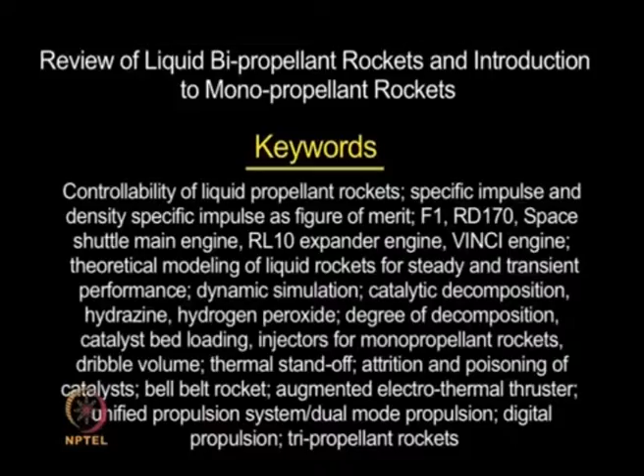Good morning. In today's class, I will be dealing with monopropellant rockets and hybrid rockets as a continuation of the chemical rockets. But just to make sure we are very clear about what we have done so far, let us quickly review what we learnt in solid propellant rockets and liquid propellant rockets.

We went into detail on solid propellant rockets, but we said controllability is a problem. What do we mean by that? Once a solid propellant rocket gets ignited, like you have a star grain or a cylindrical grain, once this grain is ignited, it is just not possible to stop the combustion.

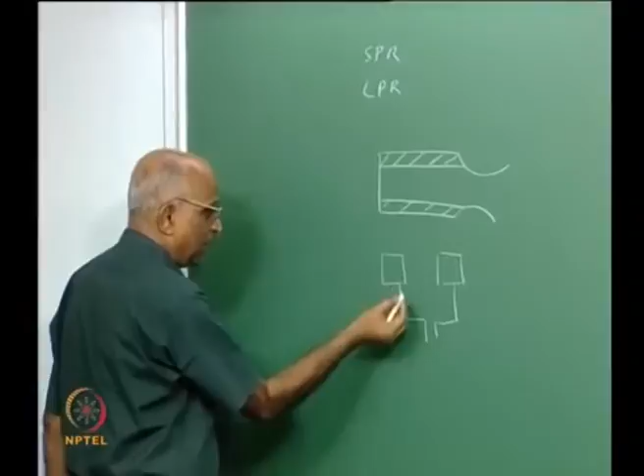Whereas in a liquid propellant rocket, since you are feeding the propellant from a tank into the combustion chamber, maybe by a pump, maybe by gas pressure, regulated or blow down mode, or stage combustion cycle mode, it is always possible to stop feeding it and you can have control.

Therefore, a liquid propellant rocket is more versatile in that control is possible. Not only can you control the flow, but supposing I have a control system to control the chamber pressure, I put some control here, compare it with a reference, and using this control system I can control the chamber pressure. I have a reference chamber pressure and make sure the reference and actual values are the same.

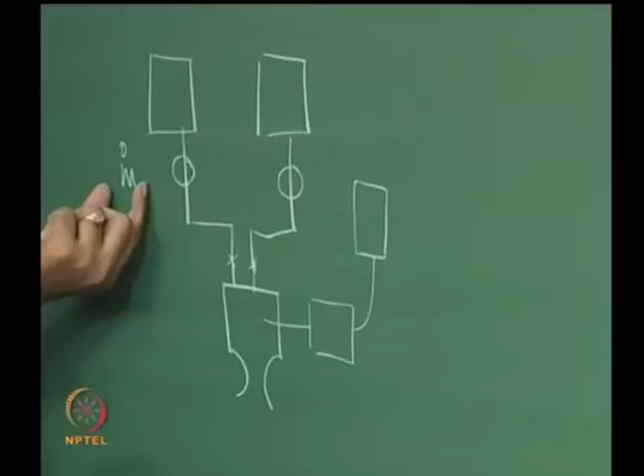Supposing I want to control the mixture ratio, maybe I monitor through a mass flow meter the mass of fuel flowing in, let us say m dot f. I can measure m dot o, and instantaneously record the ratio of m dot f to m dot o through a particular circuit. I feed this signal through a mechanism, and if I find the mixture ratio is exceeding, I can give a command to these valves, or to a valve upstream, to slow down.

Control is possible, not only starting and stopping, but also mixture ratio control, pressure control, and hence thrust control. Therefore, we say a liquid propellant rocket is more versatile.

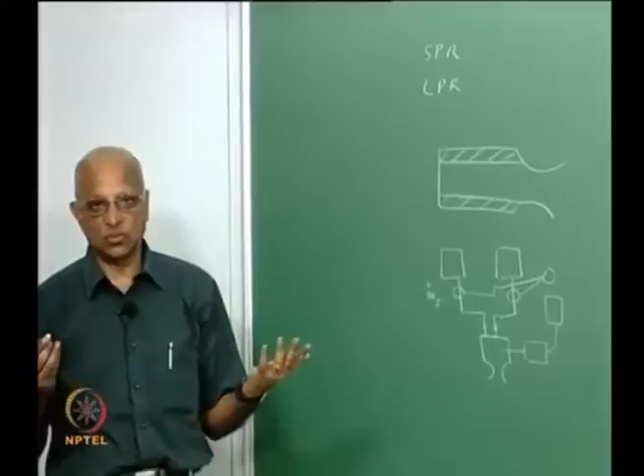Not only is it more versatile, it also has higher performance compared to solids, because in solids we add aluminum, so the molecular mass of the exhaust is high. Whereas if I choose hydrogen-oxygen here, my performance, or specific impulse, is quite large. Therefore, in general the liquid propellant rocket is more versatile and has better performance than solid propellant rockets.

But then we also see it becomes a little more complex. I have plumb lines, tankages, and pumps, and therefore it is a little more complicated. But I will come back to this. Whether we can simulate this through theory is something questionable, and maybe I will spend some time on it.

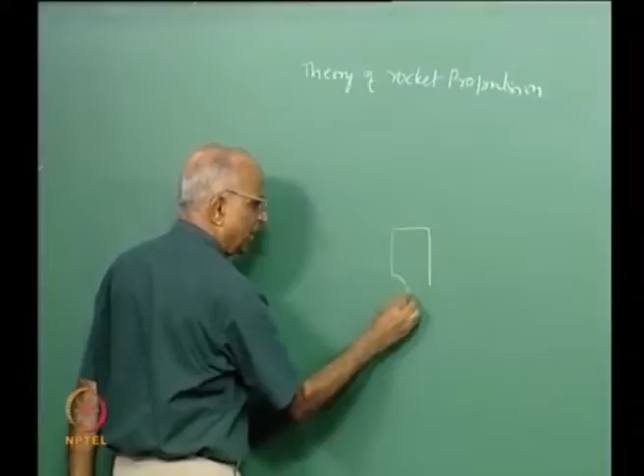Therefore, we say liquid propellant rockets are more versatile, and let us take a few examples. Like for instance, when we studied the theory of rocket propulsion, you will recall we said boosters are those rockets used during takeoff, and the upper rockets are known as sustainers or upper stage rockets.

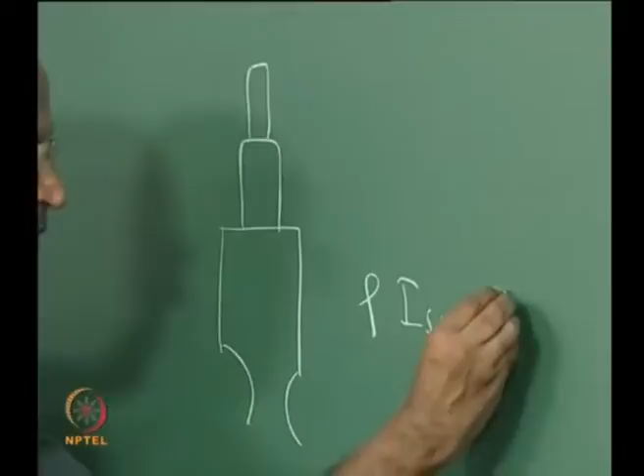For booster rockets, we found that in addition to ISP, the term rho ISP becomes important. You will recall why we said that: the mass of the casings, the mass of the upper stages, become important, and under those conditions we derived an expression that rather than ISP, the product of the density of the propellants multiplied by ISP becomes a figure of merit of the rocket.

Therefore, whenever I choose the booster stages, that means the stages which first start off, it is essential to use what we call dense propellants. What do we mean by dense propellants? Propellants having higher density.

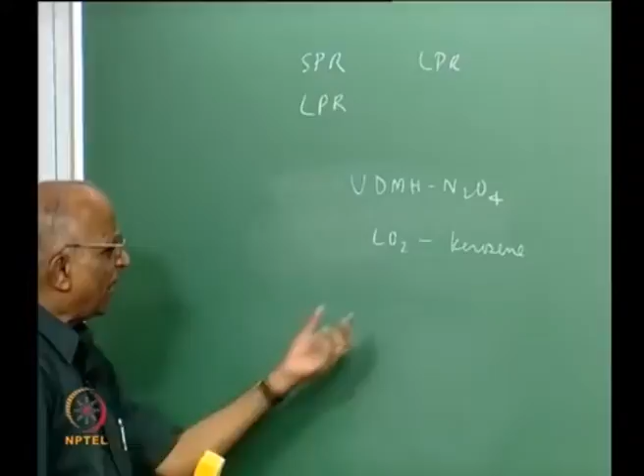And when I talk in terms of dense propellants, what immediately comes to mind is, can I use propellants which are dense, like UDMH, which has a good density, maybe with N2O4 as an oxidizer? Can I use liquid oxygen with kerosene? These are somewhat denser, and therefore we find liquid oxygen kerosene has been traditionally used for the booster stages.

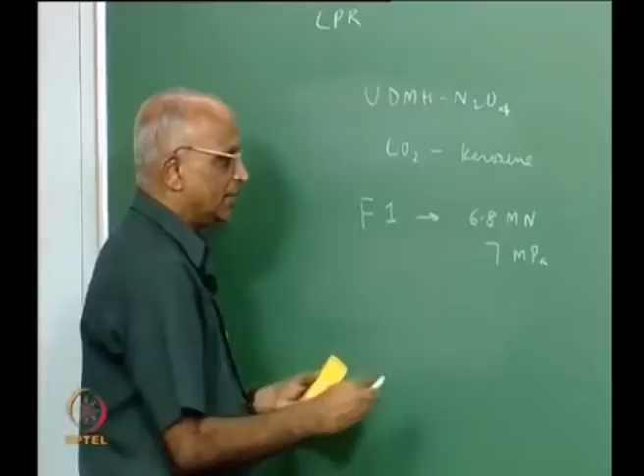The chamber pressure of this, which uses liquid oxygen and kerosene, is something like 7 MPa, that is 70 atmospheres. Pressure is low, thrust is large, and the cycle of operation is the gas generator cycle.

Another rocket used as a booster is the Russian rocket known as RD-170. Its beauty is it has a higher thrust, of the order of 7.25 meganewton, maybe same class, but the chamber pressure is extremely high, of the order of 24.5 megapascal, that is something like 240 bar. Since it is high pressure with large thrust, we use the staged combustion cycle engine.

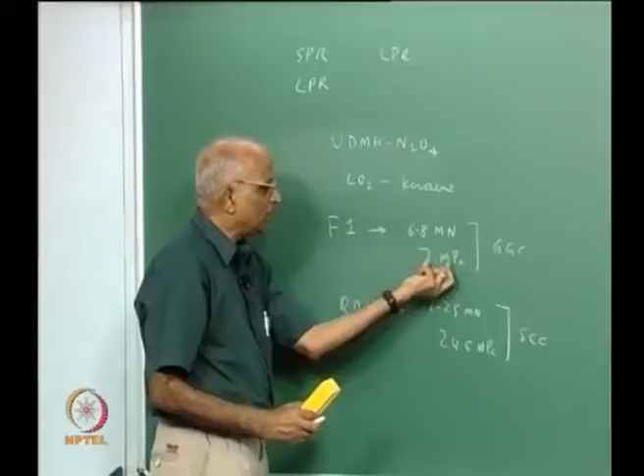Therefore, these are two examples of very large rockets which use liquid oxygen and kerosene. One uses the staged combustion cycle, and when you go to lower chamber pressure, you use the gas generator cycle. These are the two typical examples.

In India we started with UDMH N2O4, and this is what the French used earlier in their Ariane launch vehicles for boosters. But ever since we learned that UDMH is cancer causing and also costly, the trend is not to use UDMH. So Ariane rockets 1 to 4 made use of UDMH N2O4, but the more recent Ariane 5 does not.

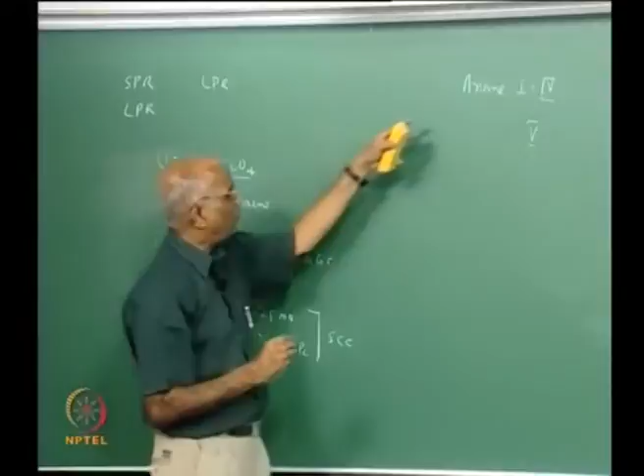What we use instead is a derivative of what was used in Ariane. It also uses a gas generator cycle, and the typical thrust is around 60 ton, and the chamber pressure is of the same order, around 58 to 62 atmosphere pressure, that means 5 to 6 MPa.

These are some of the booster engines with the heavy propellants, LOX, kerosene, and UDMH N2O4.

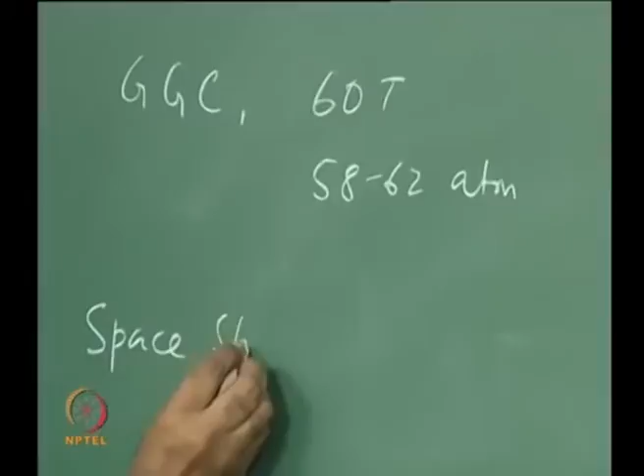But what was done more recently is, if you look at the space shuttle - mind you, the space shuttle has now performed its job, it is no longer operational, the last space shuttle is over - what was done in the space shuttle is you had liquid hydrogen and liquid oxygen engines. These generate a thrust of around 1.8 meganewton. The chamber pressure is again quite large, almost 19 MPa, that means 190 atmosphere pressure, and this used the staged combustion cycle.

Even though the density of the propellant is small, they have a huge booster, and we have seen pictures on the back of it. You have a liquid hydrogen tank that carries the liquid hydrogen, and you operate with liquid hydrogen and liquid oxygen. You have 3 such engines used in the space shuttle.

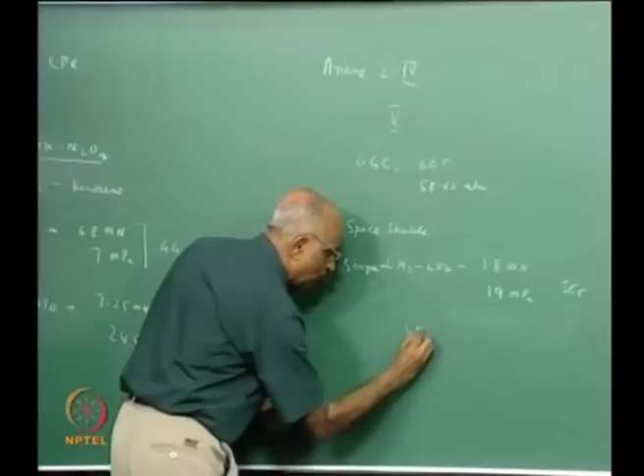Whereas if you look at the French type of things, as I said, the Ariane 5 went off from using UDMH N2O4 to using LH2-LO2. They have a thrust of around 1.1 meganewton, that means 1.1 into 10 to the power 6 Newton. The chamber pressure is around 11 MPa, and since the chamber pressure is less, they use the less complicated gas generator cycle, GGC.

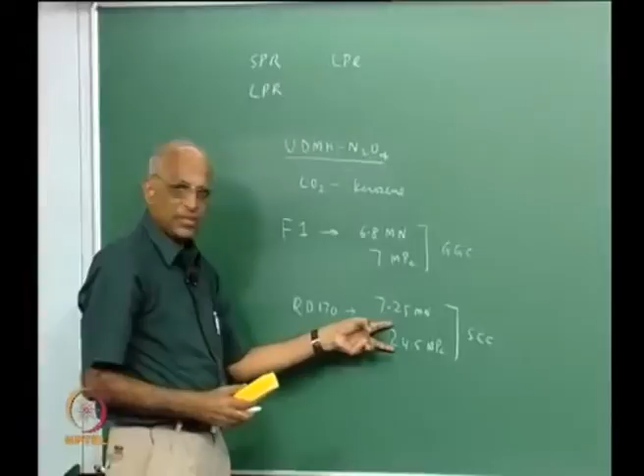Therefore, you find different types of propellants are used in different stages, and when we want much less powerful engines, we can even go for gas pressurization and use it as the 4th stage. Maybe you can use MMH and N2O4, and other propellants like what is used in missiles. These are typically the different type of engines used. We see sometimes gas generator cycle being used, sometimes staged combustion cycle is used. Staged combustion cycle is used only when the chamber pressure is very high, and these give extremely high performance.

Something we must remember, I told you of an engine known as the RL10 engine, which uses liquid hydrogen, liquid oxygen, but uses the liquid hydrogen in an expander cycle. What was an expander cycle? One in which the hydrogen gets evaporated while cooling the chamber, and that vapor of hydrogen is used in running a turbine.

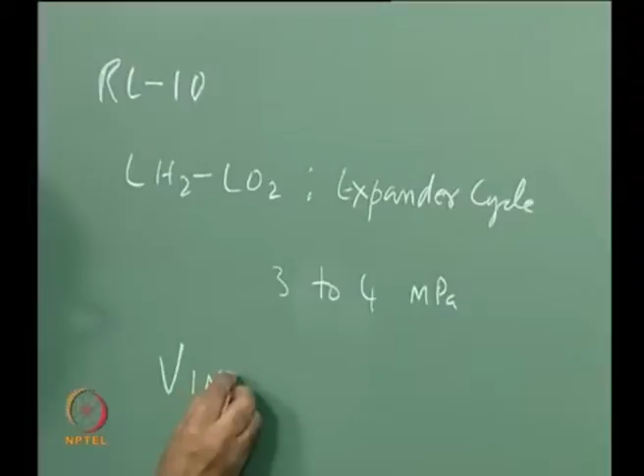This is very popular. The chamber pressure is low, of the order of 3 to 4 MPa, that is 30 to 40 atmosphere, and this has been extensively used in many missions for the upper stages. Of late, French people are working, and that is challenging, on a particular rocket known as the Vinci rocket. I give a homework problem on the Vinci rocket. This again uses the expander cycle.

I ask you to calculate what must be the heat transfer from the chamber to the coolant in order to have an expander cycle. This Vinci rocket has a turbine which rotates, I told you, around 1 lakh RPM. These are some of the developments, maybe we should keep in mind as we study liquid propellant rockets.

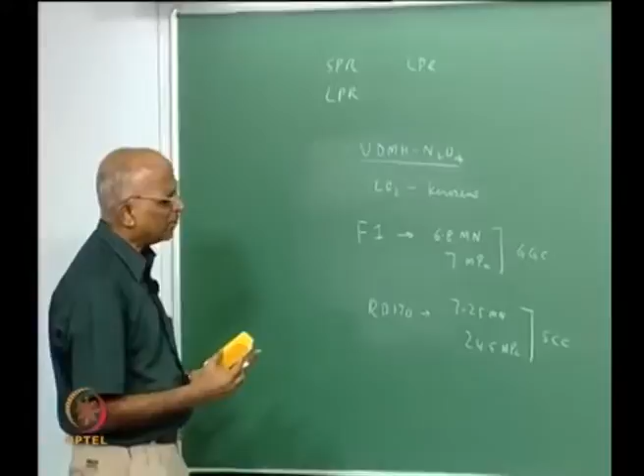It is quite challenging. We find Vinci being developed, we find other rockets being developed, but something else with respect to liquid propellant rockets compared to solid propellant rockets is it is easily amenable to theoretical analysis.

Not that I am saying it is superior in any way. A solid propellant rocket has distinct advantages. Supposing I want a short takeoff and landing for an aircraft, I can just have unrestricted burning, attach one or two rockets beneath my wings, and burn it. It will give me thrust immediately for a few seconds, and I can take off in a very short runway, as is necessary in forward areas or in some military aircraft.

So we also call it rocket assisted takeoff. The short takeoff and landing which uses rockets is also known as rocket assisted takeoff. This is possible with solids, but what I wanted to say was, let us not say everything is liquid, but when we studied liquid rockets,

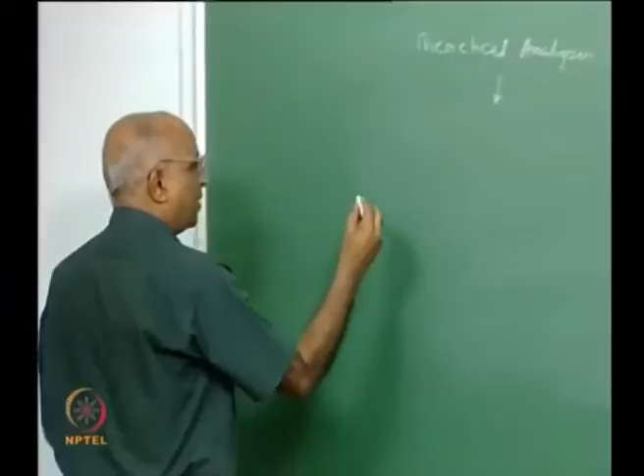we never really studied about liquid rocket. A description of rocket is like this. All what we studied is, we have a tank, and propellant flows in pipelines.

If it is a pump, I know pressure is increased in a pump. I supply it to the injector. What does the injector do? It sprays it into the combustion chamber. The thing evaporates and burns. Everything we have studied in other subjects, fluid flow, maybe thermodynamics of generation.

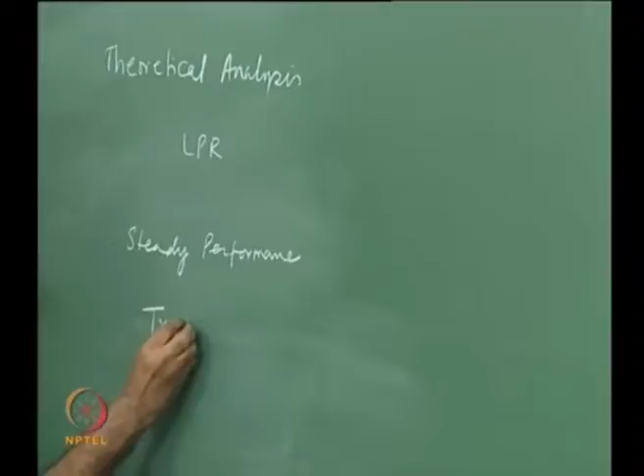Therefore, we can say a theoretical analysis of a liquid propellant rocket, for let us say steady performance prediction, or transient performance, or performance, or even if you want to look at the dynamics of it. Maybe if I were to put some shock into one of the systems, how is the rocket going to respond? Something like dynamic response is all possible, and this is where some attention is required, and there are several people working in these areas at present. Let us quickly go through what I mean by this and how do we do it.

Supposing we have a liquid propellant rocket, what did we have? We have the tankages, and from the tankages what happens? I just draw a single tankage. From the tankage through the plumb lines, maybe curved and all that, through these lines propellant flows.

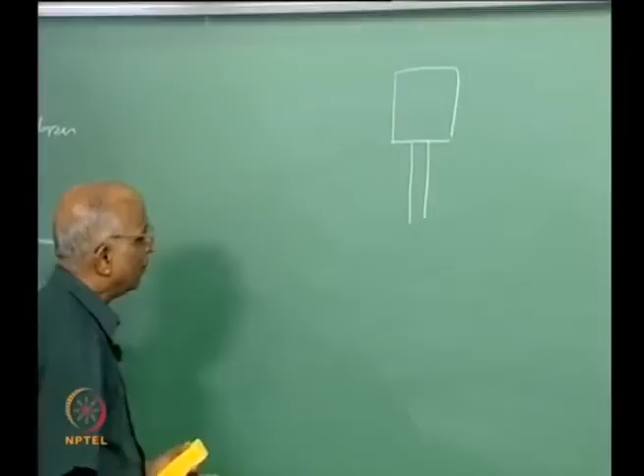And how do you establish the pressure? If the tank pressure is, let us say, PT, how do I get the pressure here? I get a drop in pressure, and I say that the drop in pressure goes as maybe 4FL over D into V squared by 2, maybe under some conditions, but I need this. Therefore, I can write this equation as pressure drop in a pipeline goes as something like a resistance into velocity, goes as the mass flow rate, let us say m dot square of the propellants.

But under dynamical conditions, I have the mass of propellant which accelerates. That means I have mass into acceleration, or rather mass into dV by dt. And what is the mass? Rho AV. Therefore, I am talking in terms of dm by dt, and because of this acceleration, I have a pressure drop taking place, I have a force due to acceleration, which is Newton's second law,

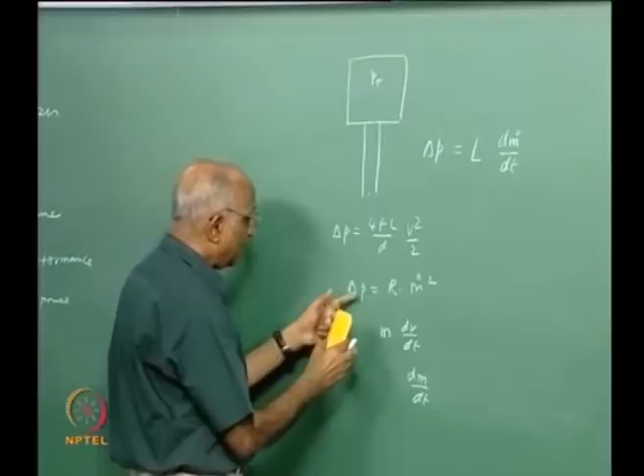and therefore I can say the delta P due to acceleration I can write as something like an inductance, or some value of inductance, like we have current changing into dm dot by dt, because I have dv by dt, and therefore I can write the net pressure drop under dynamical conditions as something like L into dm dot by dt. This is the pressure drop in a line under static conditions, and this is under dynamical conditions. Therefore, this is the total pressure drop.

How do I get the pressure rise in a pump? Let us say this feeds into a pump, and what does the pump do? It increases the pressure from a small value to a larger value, and here you get the outlet. And how do you get the pressure in a pump?

We had said pressure rise in a pump, delta P across a pump, is equal to the flow rate Q, or m dot, into something like delta P. But let us be clear, from a units point of view, it should be m dot times delta P divided by density, which is the rate of work done in a pump.

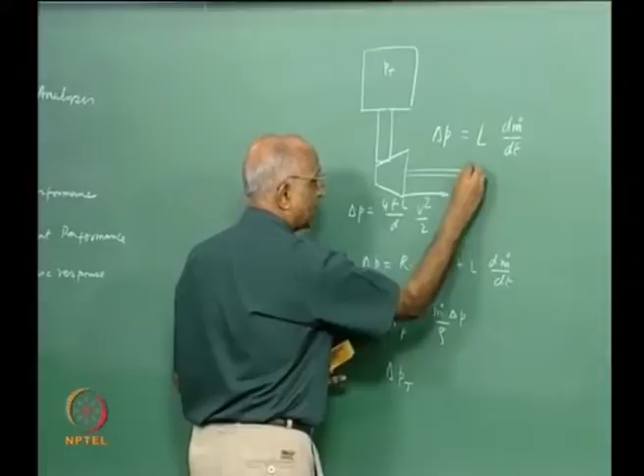Similarly, the pressure drop in a turbine which drives this pump is given by the work done in the turbine, taking gas from the gas generator and driving the turbine. We said it equals mass of the gas generator into Cp into Tgg into 1 minus 1 over the expansion ratio in the turbine, into gamma minus 1 by gamma. This was under steady conditions.

I can figure out the pressure here and there, go along all these lines, get into the injector, and find out the mass flow rate through the injector. Therefore, everything can be calculated from simple equations.

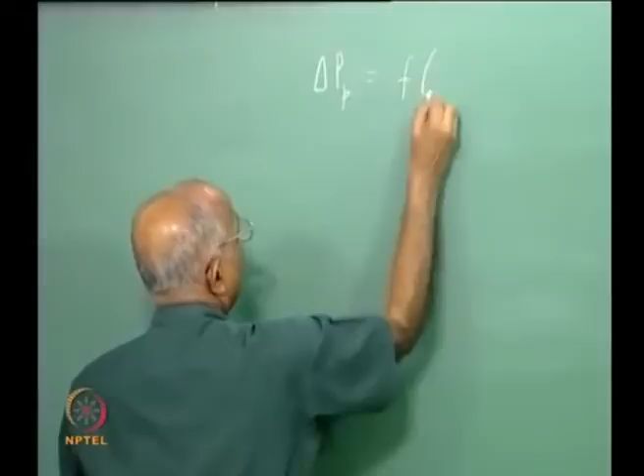Let us go one step further. We know the pressure rise across a pump depends, as we saw with non-dimensionalization, on the speed, the mass flow rate, and the density, or Q and rho. I can write this as some constant k1 into n squared plus k2 into n into the mass flow rate plus k3 into m dot squared, and this can be proven considering the blade geometry, that the pressure rise across a pump is given by this expression.

We also told ourselves that across a turbine, since all turbines were impulse turbines, this could be written as the resistance into m dot squared. Therefore, the pressure rise across a pump can be written in terms of the speed of the pump and some constants, and similarly, the pressure drop across a turbine can be written like this.

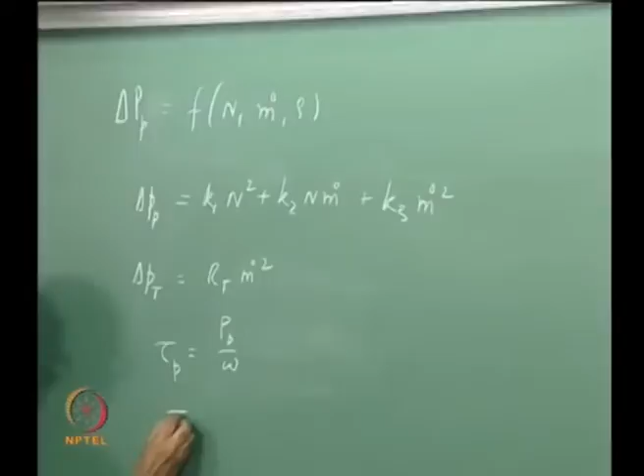We already had the expressions for power of a pump and power of a turbine. How do I use these? Let me put it in terms of capital P. I can translate the power into a torque. Torque of a pump, tau of P, is equal to power of a pump divided by the angular rotation. Tau of a turbine is equal to power of a turbine divided by omega.

The turbine drives several pumps, maybe the fuel pump, maybe the oxidizer pump, and therefore torque from a turbine minus torque from a pump should be equal to the moment of inertia of the moving parts, which can always be calculated, into d omega by dt.

Therefore, I can now use all these sets of equations together to find out the pressure at each point, the speed of the turbine, and not only that, but I can find out as a function of time how the speed of the pump should develop and how the pressure should develop.

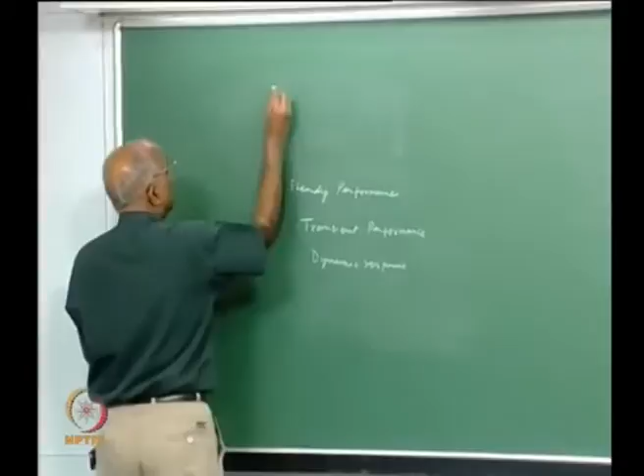What do I use to get the pressure? I have a gas generator, and the equation for the gas generator which we wrote earlier was dm by dt equals mass which flows in minus mass which flows out. Mass which flows in is known from the mixture ratio. Mass which flows out equals 1 over C star into P into AT. And dm by dt equals dP by dt into V by RT, which equals m.

Therefore, I am able to get everything I want through this set of equations which describe my system, and it will indeed be challenging to put together all these things with dynamics, and this is what all of us like to do with liquid propellant rockets. We can say this is something like a dynamical simulation or theoretical simulation of a liquid propellant rocket.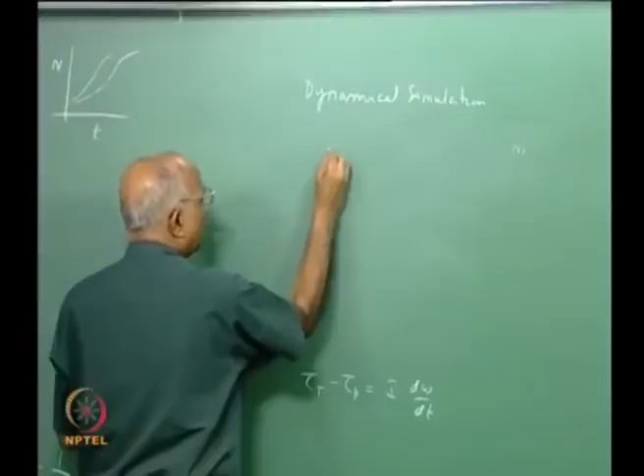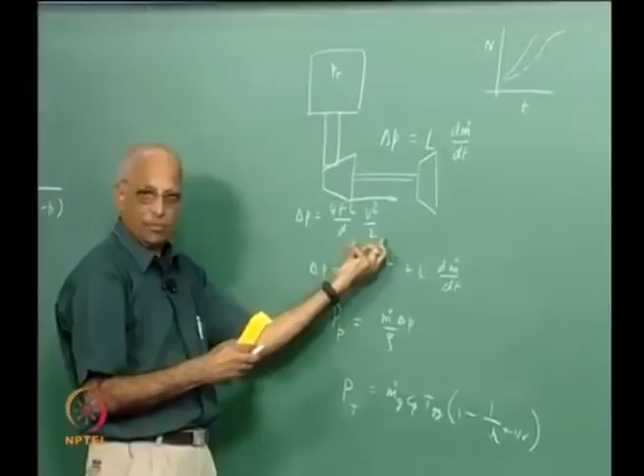You will see people always talking in terms of: do you have a dynamical model of your system, or a static model of the system? All that is meant is these equations have to be put together. Maybe I went through it hurriedly since we've covered individual components, but we should keep this in mind. In a dynamical model, not only do you solve for the parameters at different places, but also you put in your control system. What is the control system? You would like the mixture ratio to be fixed in the chamber, and for that you need a control system which controls this as it is moving. This is all about liquid propellant rockets, and you see even a simulation is possible.

Having said that, we continue our exercise into monopropellant rockets. What are monopropellant rockets? We use a single propellant. When I use a single propellant, how does it break down? How does it generate hot gases?

In high school, we talked about certain substances known as catalysts. A catalyst is a substance which improves the rate of a reaction without itself taking part in the reaction. That means it does not get changed during the reaction. A typical example: if I have CO plus O2, I want to form CO2, dry CO and O2 will not form this, but water vapor will catalyze the reaction and help you get it.

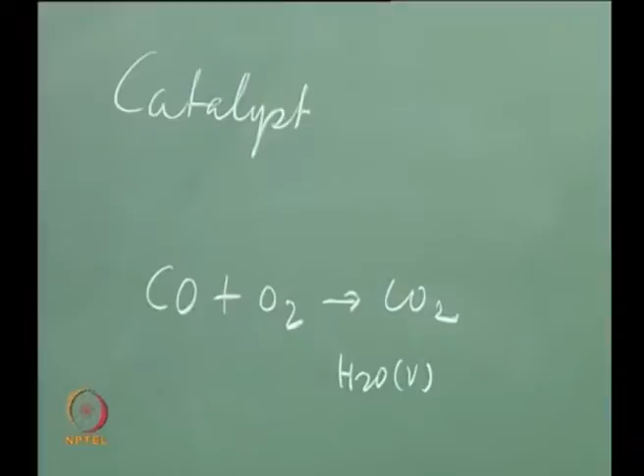You have catalysts which could either be homogeneous or heterogeneous. Let us take an example. By heterogeneous, it means it is in a different phase from the substance which it is catalyzing. And why does it have to happen?

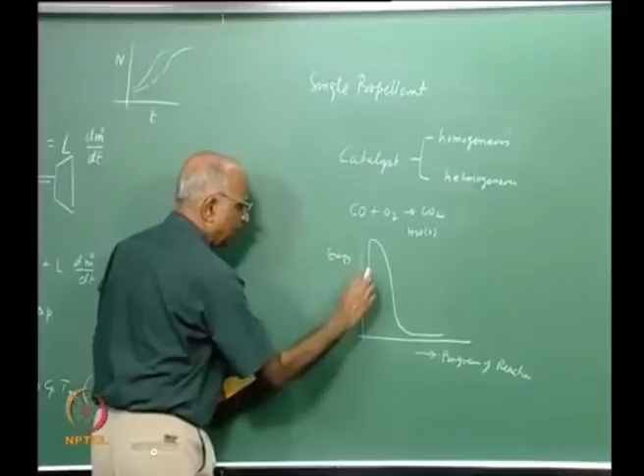Maybe this is your reactant, some substance like a single propellant. Combustion products have a much lower energy level. This is the heat of formation, or the energy of the products. I have to give some energy for it to start reacting, and once it comes here it goes to this level - so this axis becomes the progress of the reaction, and this becomes the energy involved. This is the ignition energy required to start a reaction, and once a reaction starts the reactants go to products. When I use a catalyst, I reduce the energy which is required - that means a catalyst reduces the activation energy to start a reaction. That is the basic function of a catalyst.

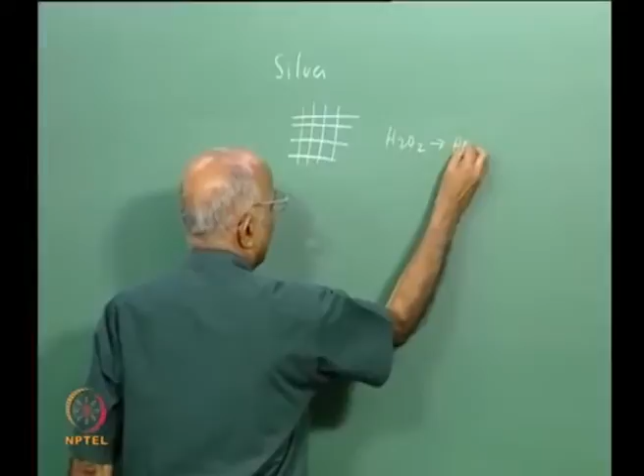We have certain substances like silver. When I have a silver wire, make it into a mesh, and pour hydrogen peroxide over it, the hydrogen peroxide dissociates into H2O plus O2 - that is, 2H2O2 becomes 2H2O plus O2. The silver is heterogeneous because it is a solid, and it catalyzes liquid hydrogen peroxide into two gases, steam and oxygen.

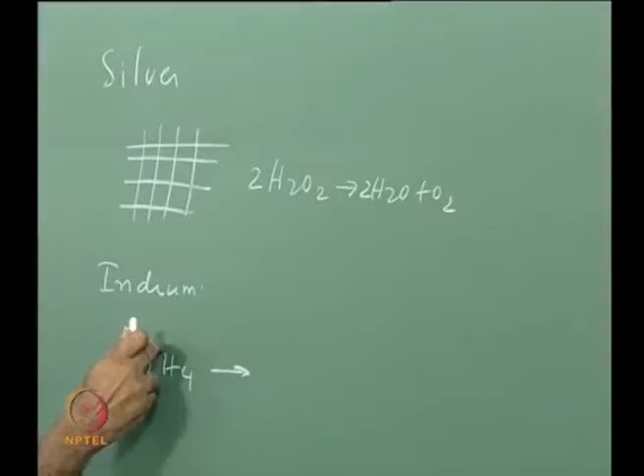Similarly, if I have a catalyst like iridium - maybe iridium ion - when it is in contact with hydrazine, N2H4, the iridium catalyzes the decomposition of hydrazine into ammonia plus whatever is left. Let us say 3 N2H4 equals 4 NH3 plus N2: 12 hydrogens here, 6 here plus 4 plus 2 equals 6 here. This is the decomposition reaction, and in presence of iridium ion, the hydrazine is decomposed to ammonia and nitrogen.

If you look at the heat of formation of hydrazine, which we studied when we were studying propellants, it is around plus 50.3. For ammonia, the heat of formation delta HF star at standard condition was something like minus 49 or so. Therefore, you say minus 4 into minus 49, minus of 3 into 50.3 - this is positive, and therefore the net contributes to the heat here. We had: minus of heat liberated in the reaction equals 4 into minus 49 plus 0 here, minus 3 into 50.3, in kilojoules per mole.

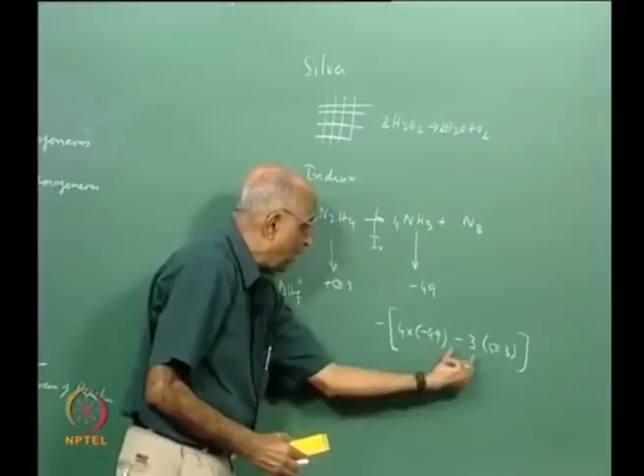I had 3 moles of this, I had 4 moles of this, therefore this and this get added over here, plus and plus here, and I get heat of decomposition over here. And this is how a monopropellant rocket works.

Therefore a monopropellant rocket will be different from the rockets which we studied so far, in that I just have a chamber. All what I need to do is put a catalyst over here.

And how do we put this catalyst like iridium? I have balls, I need iridium to be coated, and I take maybe alumina, which is something like a porous refractory. I make balls of alumina, maybe 1mm or 2, 3mm thick or 3mm in diameter, spherical ones, and into this I coat iridium ions on it. Therefore in depth also it is porous, so iridium ions will be there.

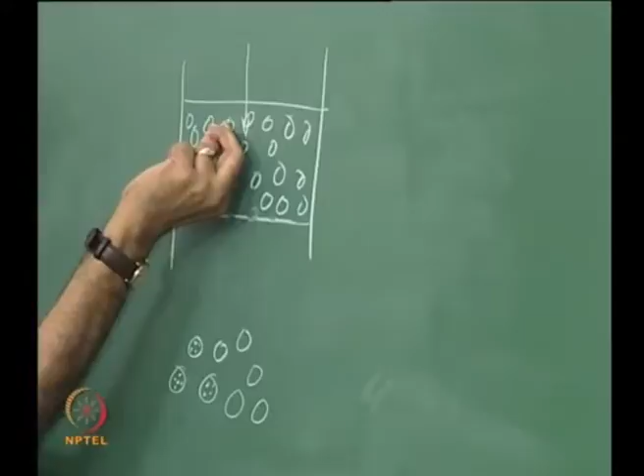I put all these things over here, and into this I pass hydrazine. Hydrazine, when it is flowing, will come in contact with iridium, because these are all porous things, and into the alumina I have iridium, it will flow into it, react with iridium and decompose, and out of the thing I will get the dissociated products which are at a high temperature.

The typical temperature could be between 1800 Kelvin to a lower temperature of 800 Kelvin. I will come back why this temperature changes. Therefore this is the function.

Therefore all what I now need is, I have a gas bottle, I have a hydrazine tank. From the hydrazine tank I inject the hydrazine into it, it gets into the catalyst bed, reacts with the iridium in the particles of alumina which is impregnated into it.

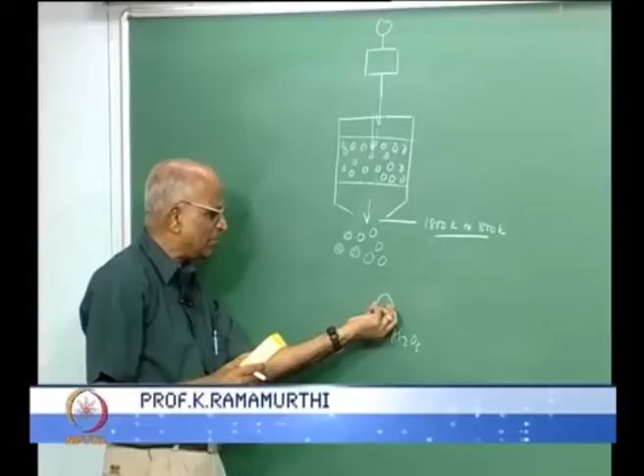Like what we do is, we take this alumina Al2O3, it is porous, I put something like hexachloroiridic acid or something and make sure that when I treat it I get iridium which is available on these crystals and inside the pores, and when hydrazine flows it decomposes. This is the function of a monopropellant thruster.

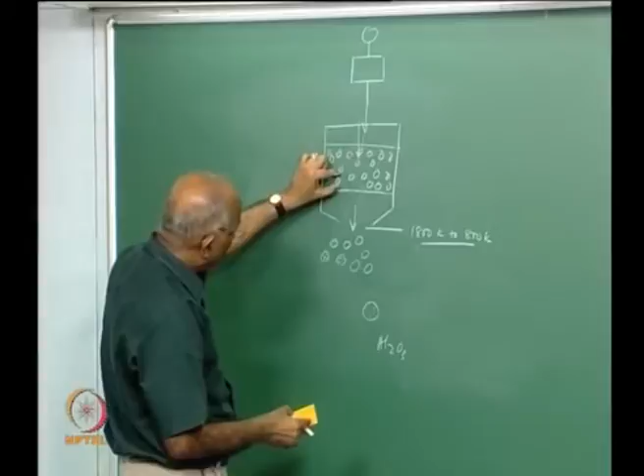But what happens when propellant keeps flowing, the ammonia which is formed begins to again decompose. I formed 4 NH3 here, and this 4 NH3 could again decompose into something like 6H2 plus 2N2. In other words, as it begins to react, immediately I get ammonia and whatever nitrogen there, and this ammonia further decomposes because of the high temperature available here into hydrogen and nitrogen.

You find that the heat of formation of hydrogen is 0, nitrogen is 0, ammonia has a heat of formation of something like minus 49 kilojoules per mole. Therefore you find that this particular reaction, minus of minus, becomes, again we have 2 minuses here, so this reaction becomes endothermic, and therefore it absorbs heat from the reaction, and this decomposition will rob heat from this particular reaction.

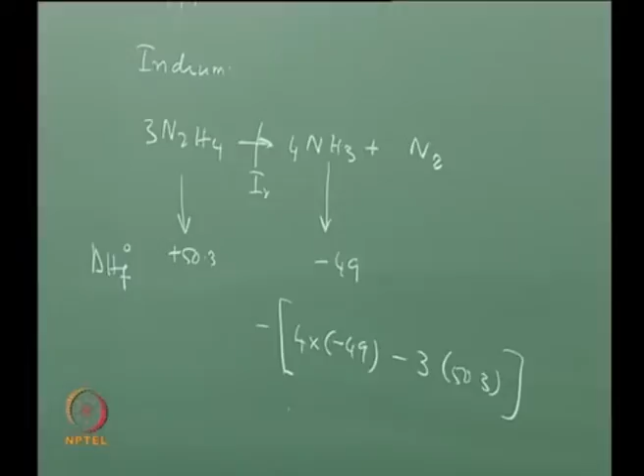And therefore more the dissociation, less will be the temperature, or rather as the dissociation increases, ammonia decreases, the temperature will keep on falling. If there is no dissociation, the temperature is around 1820 or 1830 Kelvin, and if the dissociation is complete, I get something like 800 Kelvin.

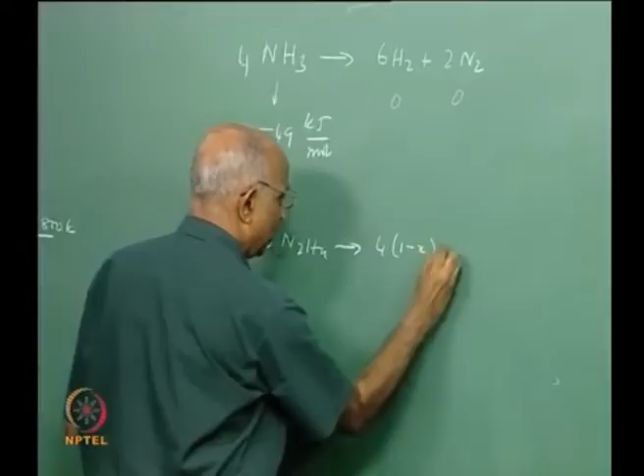How do I write both these reactions together? If I now say X of the 4NH3 which is formed dissociates, I can combine this equation and write it as 3N2H4 equals, now I get 4(1-X) which has not dissociated, X has dissociated, therefore I am left with NH3, and for each which has dissociated, now I get 6X H2, and 2, that means 1 plus 2X, because I had originally 1 N2 over here. Therefore, this becomes my equation when part of the ammonia which is formed dissociates into hydrogen and nitrogen.

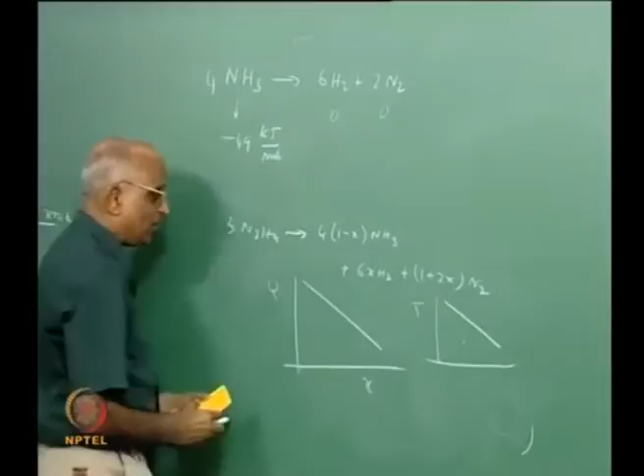And now if I find out the heat of formation as X increases, I find as X increases, the heat liberated comes down, therefore the temperature comes down, and this is where I said temperature decreases from something like 1800 to 800, but I find I am getting more and more of hydrogen. Therefore, my molecular mass of the products also decreases, from a value like 19 to something like 10, you can work it out. I give a homework problem on that.

And therefore, since molecular mass comes down and temperature comes down, if I were to put both of them together in terms of either C star or in terms of specific impulse, I find my specific impulse with respect to X is maximum for a value around 0.2 dissociation, and therefore my ISP goes like this and keeps decreasing.

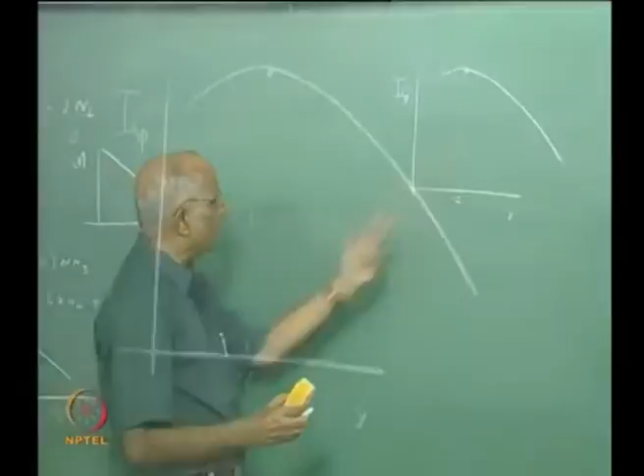I get a maximum value around this point. The change in specific impulse between 0 dissociation to 0.2 dissociation does not change much, but thereafter it begins to come down. Therefore, you would like to configure your catalyst bed such that you have degree of dissociation as 0.2, and that is when you get your maximum performance.

This is the background for monopropellant rockets. Let's try to put things together now and ask ourselves what is required for a monopropellant rocket. Well, it's very extremely simple.

I have a tank, I have a pressure regulator. The pressure regulator supplies propellant to a catalyst bed, and this catalyst bed decomposes it and out goes the products through the nozzle. This becomes my catalyst bed.

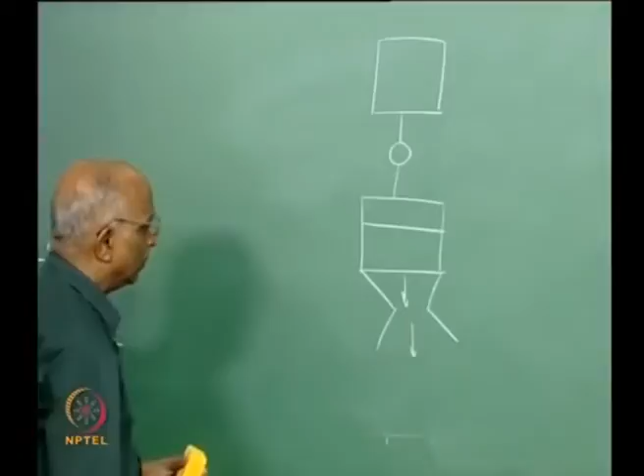I need an injector, maybe an ordinary shower head injector which forces the liquid on this is okay, but if I force it like this on the thing, it does not uniformly get distributed. Therefore, maybe I could put some screens here, a metal screen, impinge it on the screen and distribute it uniformly — that is one solution. Or else I could allow the bed to be very much near, put metal screens over here, inject it as a shower head here, impregnate the catalyst bed right at the injector — this is one other configuration of doing it.

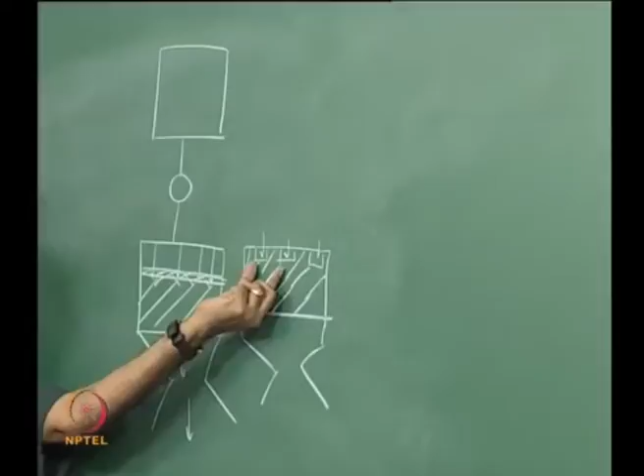It is of course necessary to make sure that whenever you put such injectors — could be some screens, could be shower head, could be these metal meshes — whatever we use, it is also important that the dribble volume, which we talked of in terms of manifold, must be small. If dribble volume is large, it keeps on dribbling and you will have thrust generation with respect to time instead of a clean cutoff; it may keep on going for a long time. That is the dribble volume.

Well, these are the only things in monopropellant rockets. We find it is quite simple, and in fact it is widely used in satellites for controlling the trajectory, or let us say orbit control, and for attitude of the satellite. This is where we use it.

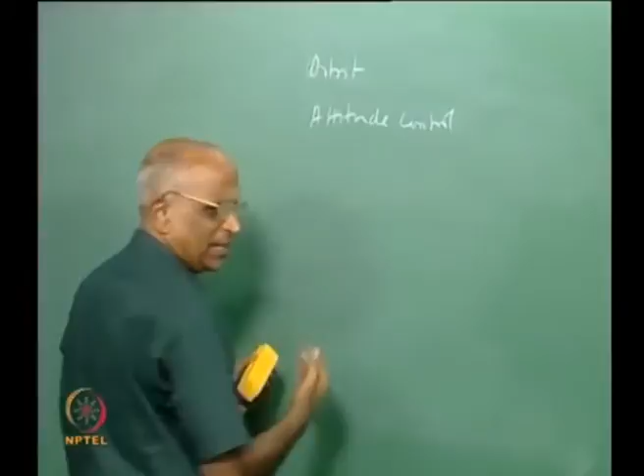Having said that, let me quickly run through what I have been telling so far in monopropellant rockets. We talk in terms of a gas bottle, pressure regulator, hydrazine tank, which pushes it into the catalyst bed over here. You have a valve, you can stop and close, you can do it in pulses, but if you do pulses, the catalyst bed gets hot and heat gets transferred back, and it may heat up the injector.

If the injector becomes hot, hydrazine may decompose and even cause an explosion. Therefore, what is it you do? You go back and tell yourself, well, this is my catalyst bed, this is how I expand it. In order to cool it, I am forcing the hydrazine through it.

I put some metal here, just like I use fins in the case of a motorbike. I use fins here such that this part gets heated and heat gets radiated out. This is something like a standoff between the thing here and the monopropellant rocket. As I told you, I would like my manifold volume, which we called the hold-up volume of the propellant, to be as small as possible.

I have the injector here, which could be shower head or some of the screens I am talking of, and this is the catalyst bed. How do you specify a catalyst bed? Let us just spend a couple of minutes on the catalyst bed.

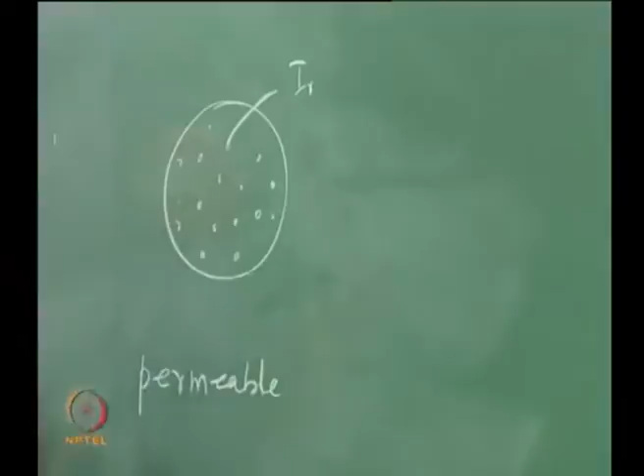We told ourselves, well, the catalyst bed consists of alumina. In the alumina, I have lots of pores or holes, and when I impregnate it, I make sure the iridium is available at all the places, and therefore, when hydrazine flows, it wets this. That means the alumina is a substance which is permeable to hydrazine — permeable. Therefore, permeability is an important parameter. This is iridium in alumina.

And therefore, it must be permeable. So how do you design a catalyst bed? After all, you have a bed of a certain size and hydrazine flows into it. Therefore, it is specified in terms of mass flow of hydrazine in grams divided by the surface area, that is, so much centimeter square, flowing per second, and this is known as bed loading.

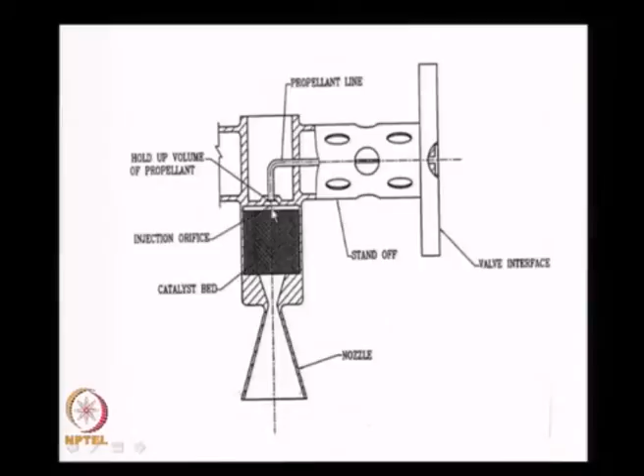What we have to necessarily ensure is that if I have the surface area of this bed to be so much, let's say a meter square or centimeter square, and if I flow hydrazine at so much grams per second, the mass flow rate of hydrazine divided by the surface area tells me the bed loading. This bed loading and the length of the bed tells me the amount of dissociation of ammonia.

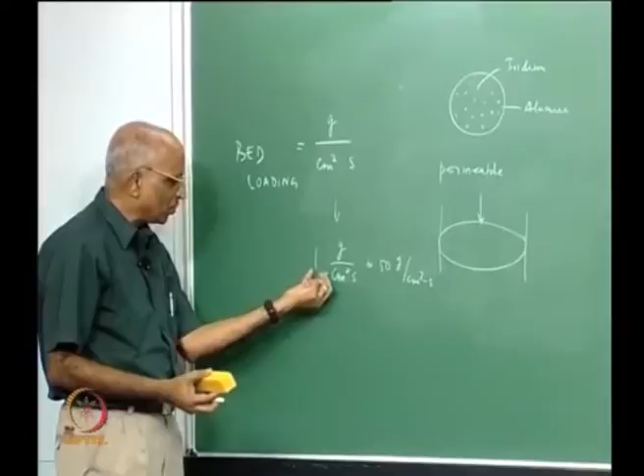This bed loading typically varies between 1 gram per centimeter square second to 50 grams per centimeter square second. For large rockets, whenever we use monopropellant, we do not go for high thrust, maybe the maximum thrust we can go is something like 500 Newton to 1000 Newton. The smallest could be anything small, maybe millinewton or so. For very small thrusters we use a small bed loading, for larger ones we use a larger bed loading.

This is all about the monopropellant rockets. We say that the temperature with the degree of dissociation keeps coming down, and the molecular mass also comes down from something like 18 to a value around 12 or so. When I put both together, the C star has a maximum value around 0.2.

What are the problem areas in monopropellant thrusters? The catalyst bed runs hot, therefore the injector runs hot, hydrazine could dissociate, and being a monopropellant it could as well explode. Therefore we must ensure thermal management. How do we do the thermal management? We told ourselves, well, I have something like a fin which will dissipate the heat whenever the thing gets hot and remove the heat from here.

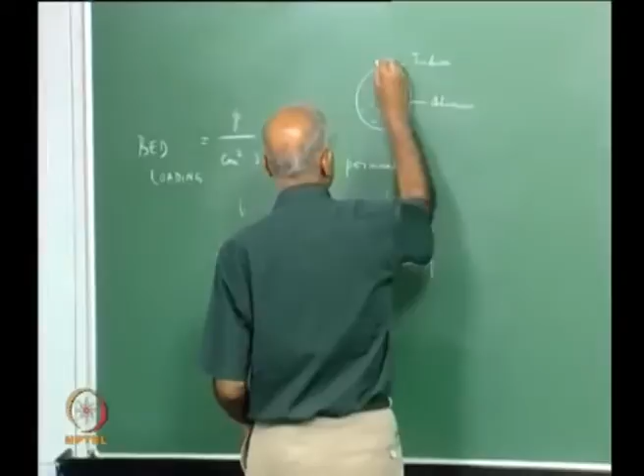Well, dribble volume must be small. We have some problems with catalysts, like whenever I have these alumina things over here and the thing gets wet, it could sometimes break, which we call attrition. What is attrition? You have all these particles rubbing one with the other, creating some pressure, leading to breakage of the catalyst, and some of the catalyst gets out through the nozzle—that is known as loss of catalyst.

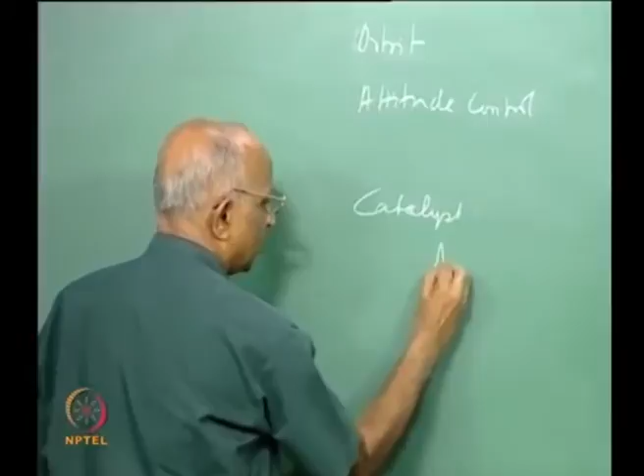Again, whenever I use it in spacecraft, I need something like a positive expulsion system. Maybe the bladder material might get into the hydrazine and poison the catalyst, meaning the activity of the catalyst can come down. The two things we have to keep in mind: the activity of the catalyst must not get disturbed, because hydrazine might contain some aniline or some material from the bladder which can block the iridium and prevent it from functioning as required.

Therefore we must ensure that when the activity of the catalyst is decreased, we call it the catalyst getting poisoned—it is no longer effective—and we must prevent the poisoning of catalysts. Of course, whenever something gets poisoned, it is not able to perform well.

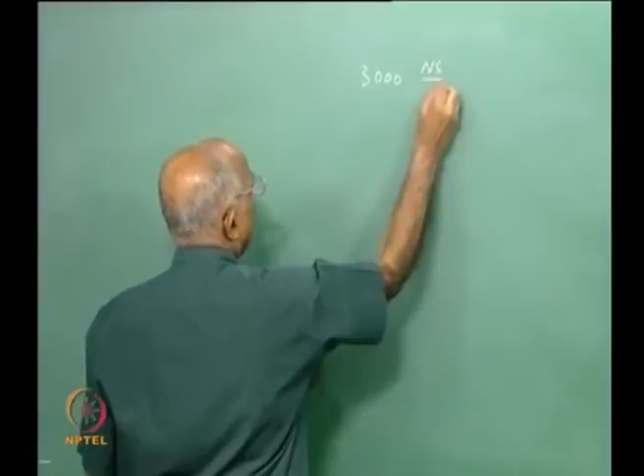There has always been interest in saying: supposing I have a monopropellant thruster, with a catalyst bed, an injector, and the thruster. Can I put some electrical heating and improve the temperature? We said the maximum temperature is around 1800 Kelvin. I increase the temperature using electrical heating, and such thrusters, in which monopropellant decomposes to an intermediate temperature and the temperature is further increased to improve ISP, are known as augmented electrothermal hydrazine thrusters.

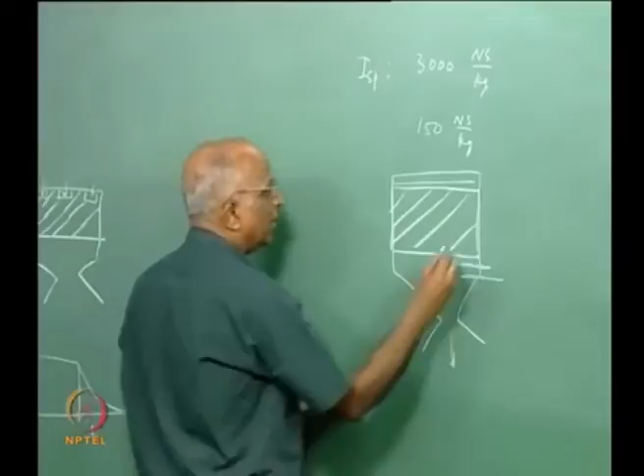I will revisit this problem maybe after some 5 or 6 classes when we talk of electrical propulsion. Since the performance of monopropellant thrusters is on the low side, I can always improve it by electrically heating the gases from the higher temperature of 1800 to something like 2500 or so, and still get a high value of specific impulse.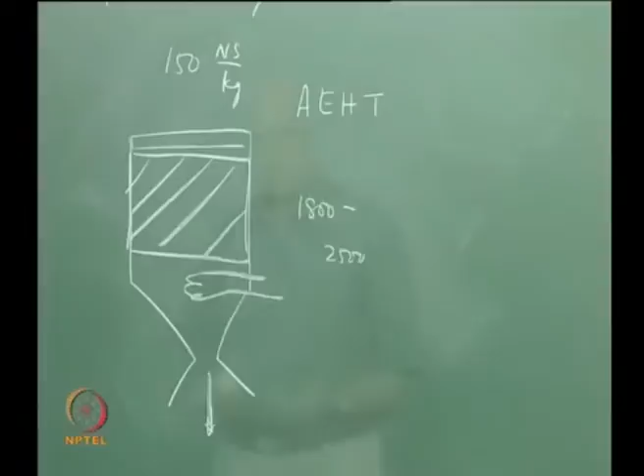This is all about the monopropellant thrusters, but there are some things we have to keep in mind. Monopropellant rockets are very versatile. In fact, I think I should tell you this example.

H2O2 I did not consider, I always kept in terms of hydrazine. Why is it? Can somebody tell me? The clue is N2H4 hydrazine has a standard heat of formation of about plus 50.3. When I talk of hydrogen peroxide, the standard heat of formation is something like minus 187 kilojoules per mole.

Now somebody can tell me why hydrogen peroxide is not used much as a monopropellant. The standard heat of formation is terribly negative. It again forms H2O plus O2, and these are zero. That means the amount of heat liberated is going to be very much smaller, because here I have positive, and therefore I can get this coming out and giving me heat.

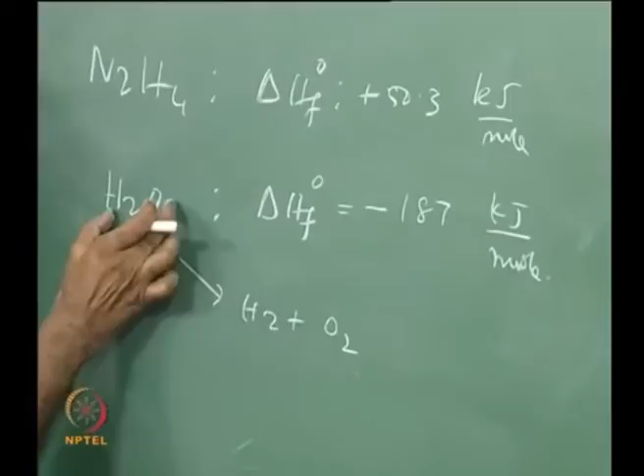Therefore, the temperature I can get by H2O2 decomposition will be much smaller, and universally, other than maybe in the early part of the program, in the 1940s and 50s, we used hydrogen peroxide as a monopropellant. Nowadays it is not used at all. The reason being I get extremely poor performance, because this heat of formation is much more negative, and these things we have covered earlier.

But there is one application. Whenever these Olympic games occur, you would have seen some people having in their belt something like a rocket, and they go across, like in the Los Angeles Olympics, you find human beings being propelled in the sky using rockets. For human beings to fly is very difficult, because we are all aerodynamically terribly unstable.

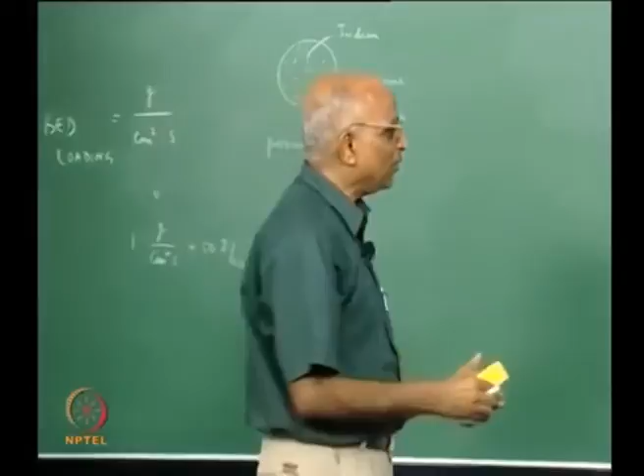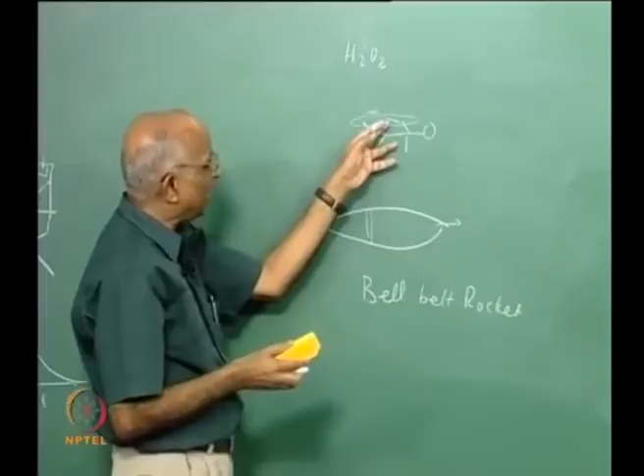For something to fly you need a good aerodynamic configuration which can fly. We have hands and legs and it is not possible, but I can always have a belt, and the hydrogen peroxide which is used is known as a belt rocket. All that is done is you have a stabilizing device, like a human being, I plot like this, hands, legs like this. You put a stabilizing device on him, make him a little more aerodynamic, and put a small monopropellant rocket over him, and whenever he wants, he switches on the rocket and can go in different directions. Such skydiving or acrobatics is done during carnivals like the Olympics.

And I give a problem on this belt rocket.

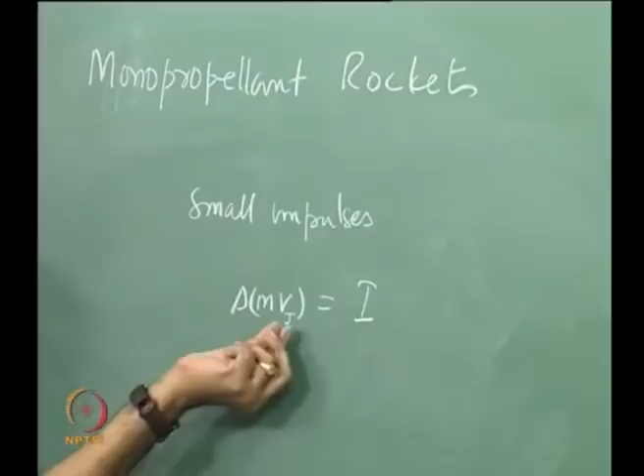Now, something I must tell you since we are talking of propulsion in the master's degree program. Monopropellant rockets can give extremely small impulses. What do you mean by small impulses? If the change of momentum delta mv is the impulse, I can pass a small amount of hydrazine and it gives me a small value of Vj. The Vj is much smaller than a bipropellant, and therefore I get very small amounts of impulse.

Why are impulses important? Supposing I have, let's say, the case of an INSAT spacecraft. I have something like 16 rockets at the edges of it, and I generate a small amount of thrust such that if its axis is not in proper shape, I can correct it, which means I have to supply a small impulse.

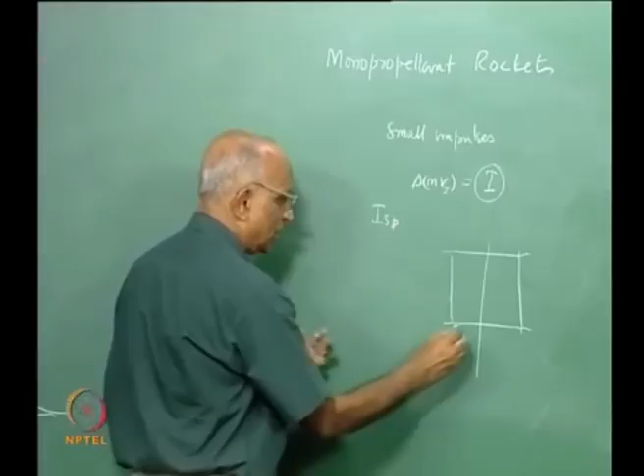How do I supply it? I need a very small amount of propellant to make a change in momentum. Now it is very useful for small corrections, but I also need a higher value of specific impulse if I want to take a satellite from one orbit to another, I need a larger value of ISP.

Therefore the question is, can I use hydrazine N2H4 for both the bipropellant mode as well as the monopropellant mode?

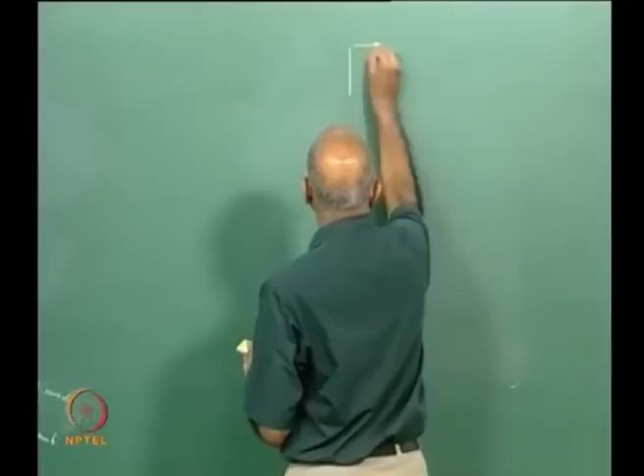What is it I am telling? Let us again think in terms of a configuration. I have the hydrazine tank, as it were, tank of hydrazine. I allow it to come through a pressure regulator to a series of small rockets which are all monopropellant rockets, all having catalyst in them, which can be used for small maneuvers. And I also carry, let's say, MON3.

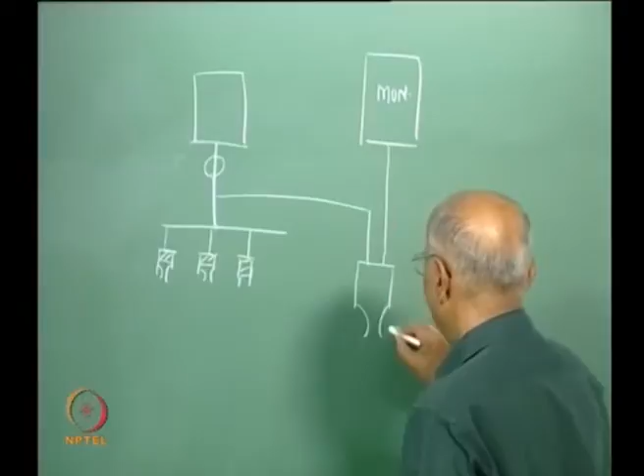You all will remember MON3 is something like N2O4, in which I add some amount of NO such that it has a lower freezing point. I also take a little bit of this and give it to a slightly bigger engine or rocket engine, and when I want to change the trajectory I operate it with hydrazine and MON3, or mixed oxides of nitrogen, to generate thrust. When I want small corrections I use this, and this is known as unified propulsion.

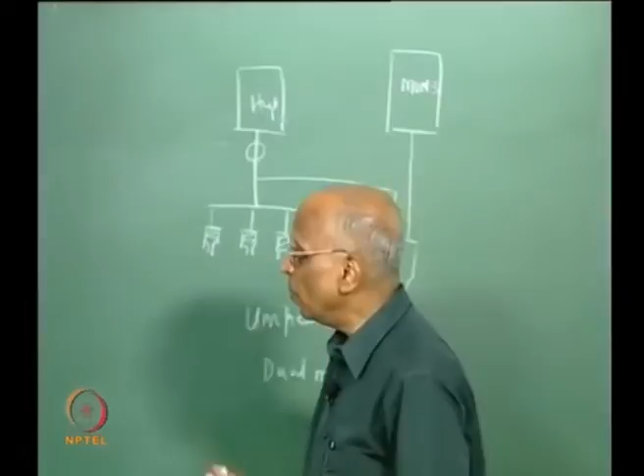Of late I do not see the word unified being used, they say it is a dual mode propulsion. What does dual mode propulsion mean? Hydrazine is used as a bipropellant in part of the system, and part of the system it is used as a series of monopropellant rockets. This is the dual mode propulsion.

But even solids can give small impulses. This is being done at JPL, wherein you have, maybe on a silicon wafer, small pellets, micrograms of solid pellets, with a resistor wire incorporated in them. Whenever you want a thrust in a particular direction, you fire a pellet in that direction and you get a small force.

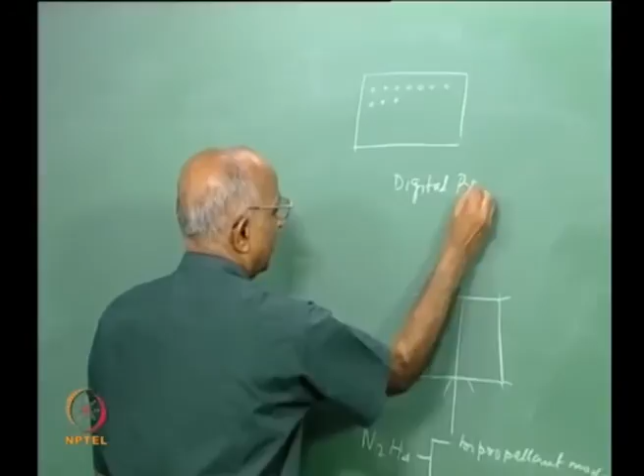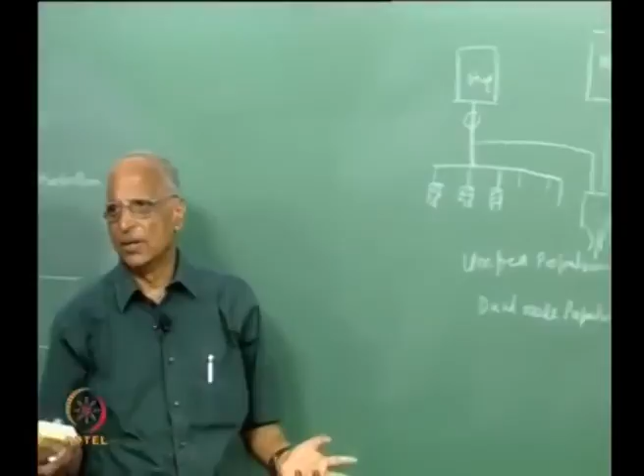This is known as digital propulsion. As you see, the subject of propulsion, especially rocket propulsion, is something in which a lot of developments can take place. All I want is a spacecraft to be given some small force, in vacuum. So I have a pellet here which I fire and it gives me this. If I want pressure in another direction, maybe I put some pellets there and fire them in that direction. This is known as digital propulsion, since you have digits which you fire. But what is conventionally used is maybe a combination of these things, though hydrazine with MON3 creates combustion problems, which I will address when I get into combustion instability.

Well, this is all about monopropellant rockets. Just to summarize, we have cold gas which gives extremely low performance, monopropellant which is still low but somewhat higher, and bipropellant which is quite high. As I told you, in bipropellant mode, hydrazine with N2O4 gives much higher performance than with MMH, and therefore it is desirable. Japanese people make use of these things, but I think we still have to understand a little more about it.

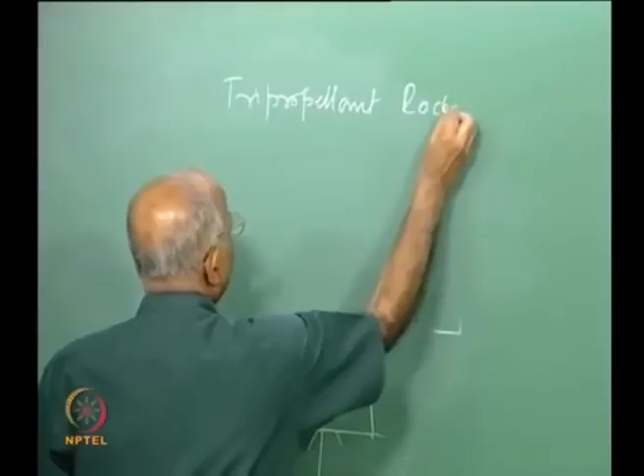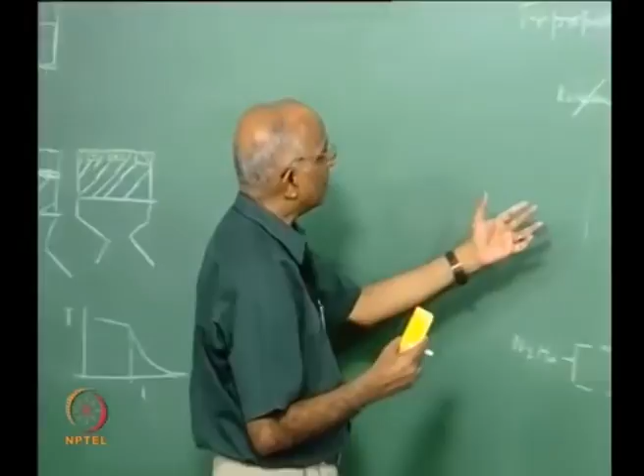I think this is all about monopropellant rockets, but just to complete the subject of rockets, instead of monopropellant or bipropellant, we could also have tripropellant rockets. What are tripropellant rockets? Maybe I have kerosene and liquid oxygen which can be used as boosters. I also carry liquid hydrogen. Initially, when I burn the system, I start burning kerosene and liquid oxygen together, and into this I can also add a little liquid hydrogen which stabilizes the combustion. When the booster stage is over, into the same chamber I cut off the kerosene and use the other two propellants, and this becomes a tripropellant rocket. The advantage is a single rocket can be made to go to space. It has still not been used, but there is some interest in having tripropellant rockets.

I think I should stop here, but before stopping, as usual, I think we have not done anything about hybrid propellants, right?

Before I start the next lecture on combustion instability, maybe I will spend a couple of minutes on hybrid rockets, because I find it has not been very promising earlier, but of late some private people, like the millionaire named Burt Rutan, formed a company known as Scaled Composites, and he used hybrid rockets for ferrying people to space. He says space can be used for enthusiasts interested in looking, something like a voyage, a place where you can go and view the earth from the top. He used an aircraft known as White Knight, which has hybrid rockets and a space capsule. This aircraft takes him to a height of 14 kilometers, from where he takes tourists into space on a suborbital flight and brings them back.

Maybe we will spend some 5 minutes on hybrid rockets in the next class, and then get into the question of combustion instability. Well, thank you then.